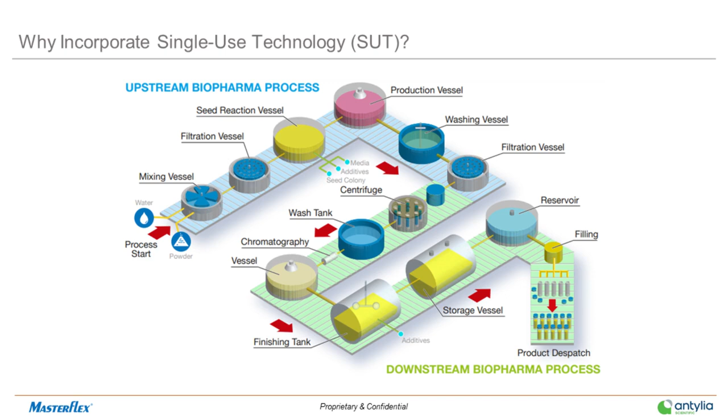With all the discussion around single-use technology and single-use assemblies, you might wonder, where are the most effective places to use single-use assemblies in a traditional workflow? Well, on screen, you will see a representation of a fairly traditional biopharmaceutical workflow. From the initial stages of cell growth to purification and harvest, and finally ending with fill and finish. At each stage along the way and within the gaps between the different steps, fluid transfer typically takes place, which means that many standard workflows have several places where single-use assemblies could be used.

So what makes up a single-use assembly? Generally, there are three main groups of products that go into a single-use assembly. The first and most significant component is the tubing, and this is typically manufactured from materials such as silicone or PVC. The second group of components are items such as fittings, connectors, filters, and other key accessories that will make the integration into the workflow possible. The third group of components are more specialized accessories, a group that includes various essential sensors that might be needed to keep an eye on flow rates and inline pressures.

We can't forget to mention the peristaltic pumps that are often used within single-use systems to move fluid from A to B. Peristaltic pumps, such as those manufactured by Masterflex, are a perfect partner for a single-use system, as these provide convenient, non-contact fluid transfer that is robust yet gentle on the biological material that's being metered. With flow rate ranges that span from microliters per minute up to many liters per minute, peristaltic pumps can be safely used throughout most areas of traditional biopharmaceutical workflows.

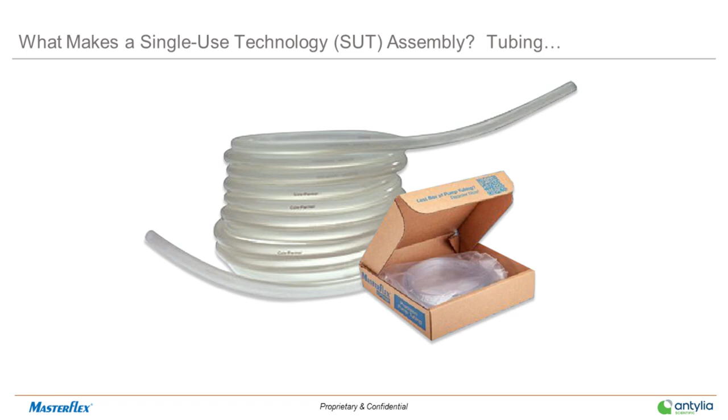Another key consideration when choosing tubing is, of course, chemical compatibility. In biopharmaceutical applications, the most commonly used and most widely accepted materials are typically silicone-based, with platinum-cured silicone tubing being the most popular due to its well-tolerated chemistry with biological materials and lack of leachables and extractables.

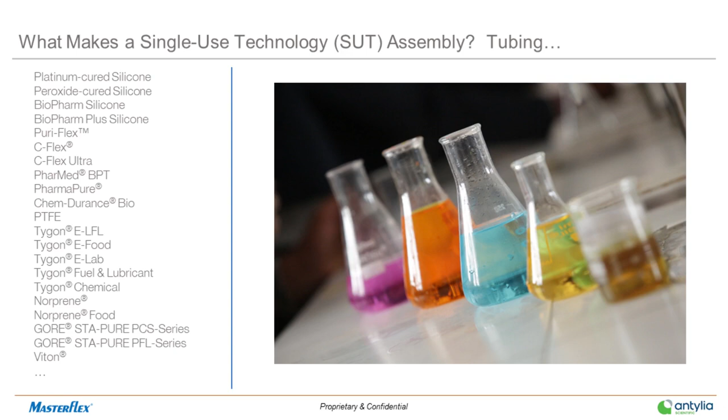In addition to the tubing, the next most commonly included components in tubing assemblies include fittings and inline accessories, such as valves and filters. The fittings are available in many configurations to ensure compatibility with the process line, from traditional threaded connections to barbed connections to sanitary and pipe threaded connections. Many different options are available.

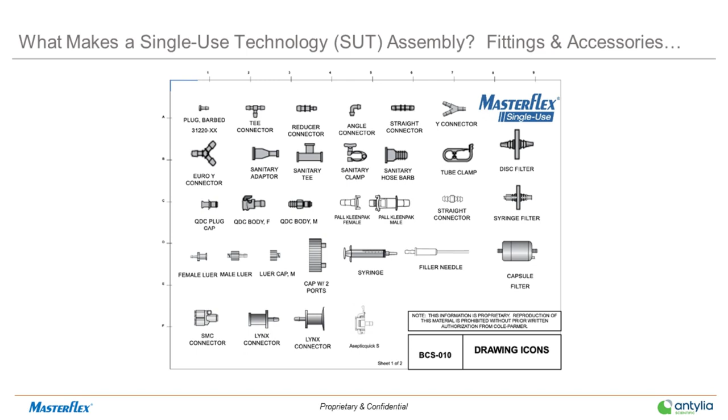Other components include essential accessories such as inline filters and items such as clamps and valves, which can be utilized to manually shut off fluid flow along a given pathway. Both this slide and the next slide highlight some examples of more commonly used accessories in this category.

Imagine having to stock all of these in a GMP environment, making sure the stock is available at the right time. Not only that, but then assembling these correctly with the right tube. This can take time and can cause problems for biopharmaceutical manufacturing.

Everyone could stock these, given enough space and time, but the beauty of single-use technology is that suppliers such as Masterflex take all of those problems and deliver you the end product when you need it, with confidence, having assembled all of the components in ISO Class 7 clean rooms with dedicated staff and facilities.

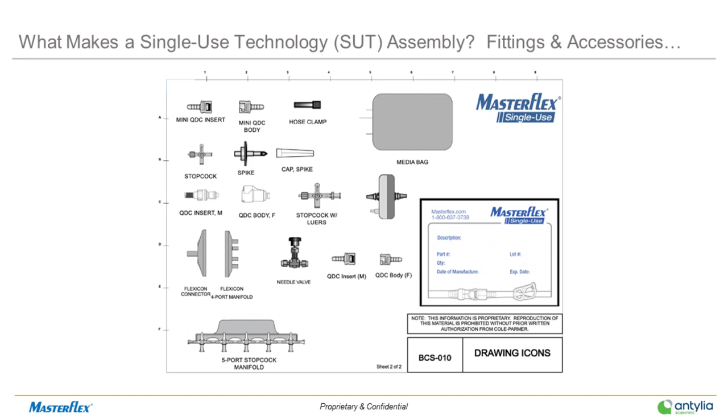And don't get me wrong, this doesn't happen overnight. Masterflex, for example, would assist and work with the end user to make sure that the design and specification of a single-use assembly is tailored to their process needs.

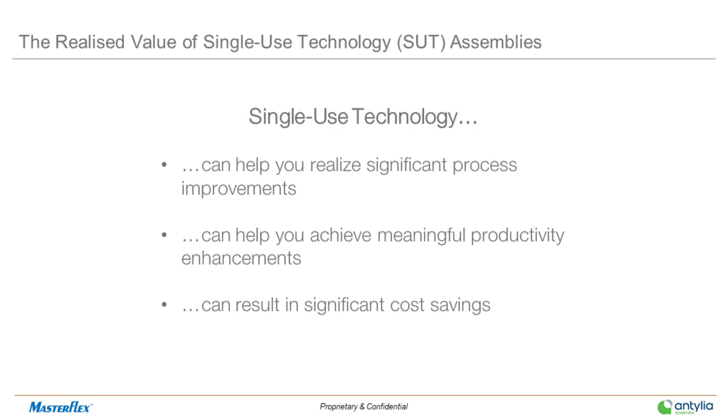Ultimately, the central message is that single-use technology can truly be implemented throughout your traditional workflows and can help you achieve process improvements, enhance your overall productivity, and even result in significant cost savings and improvements to revenue. To better understand the financial benefits that can be realized through single-use technology, let's take a look at a specific example that illustrates these benefits.

In our example, Company XYZ is a contract manufacturing organization. In their production process, they have identified 10 areas in the fluid pathway of their workflow where a single-use tubing assembly might be beneficial. And they would like to examine and compare the costs between having Masterflex manufacture the tubing assembly for them versus continuing to assemble the tubing assemblies themselves on site.

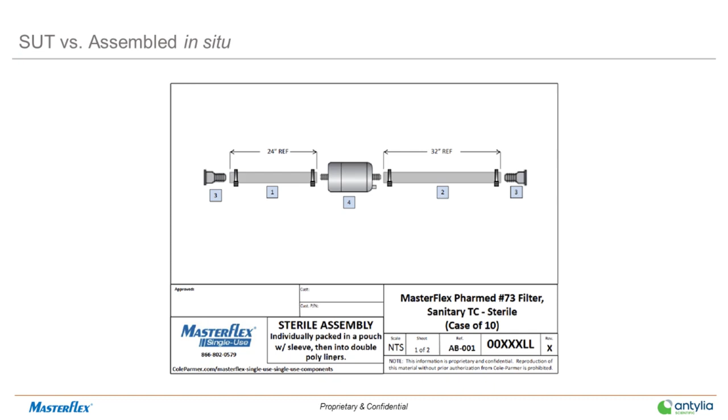The assembly they would like created for them looks similar to what is shown on the diagram on screen. The overall assembly is approximately 1.5 meters long, complete with 2 sanitary fittings secured, one on each end, and with an inline filter capsule to capture stray particle matter.

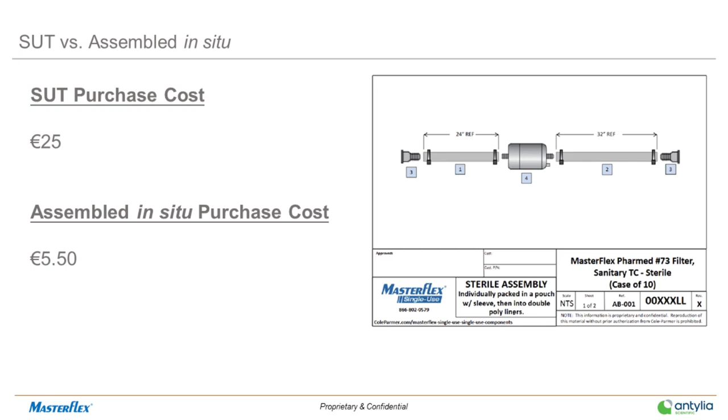But if we're truly to understand the true cost of ownership, we need to ask if there are other things to consider beyond just the initial purchase price. For example, one question to consider is what are the labor costs involved when assembling those components? Well, let's look at this a little bit closer to better understand what those costs are.

When looking at the labor costs to properly install each option, things start to get a bit more complex. For the Masterflex single-use assembly, the only real labor cost involved would be opening the package and connecting the 2 exposed ends of the sanitary fittings to the equipment in the fluid path.

But if the tubing assembly is being manufactured from raw components on site, then there are other labor costs to consider, including the labor to prepare the individual components and assemble them properly, the labor costs related to performing gamma sterilization on the completed assemblies, the labor costs to test the assemblies for integrity, and the labor costs to perform complete installation. Not to mention the associated costs with procurement of the components from multiple vendors and performing routine inventory management on all of those components.

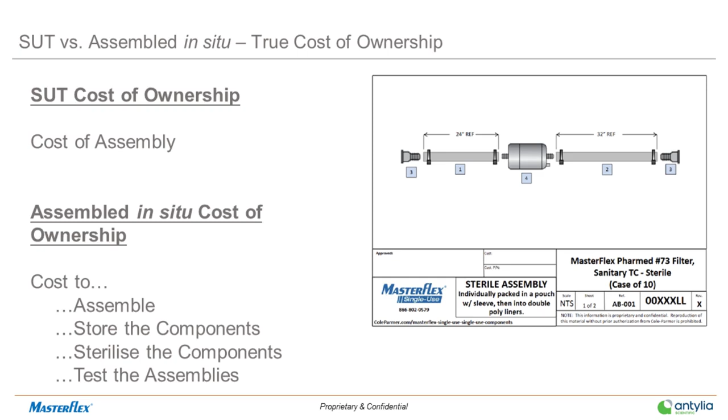For the purpose of this scenario, we will assume that the assembly technician is being paid a fully burdened labor rate of €65 per hour. Now, this includes both the salary the worker earns, as well as extra costs company XYZ incurs, for example, insurance, training, and resources for the worker.

Looking at this more closely, it is estimated to take up to 6 minutes to open the packaging and properly connect and test a Masterflex single-use assembly. But for the same assemblies to be made on site by company XYZ, the total time investment per assembly is estimated at 30 minutes, in large part because of all the separate steps that must be factored into the process.

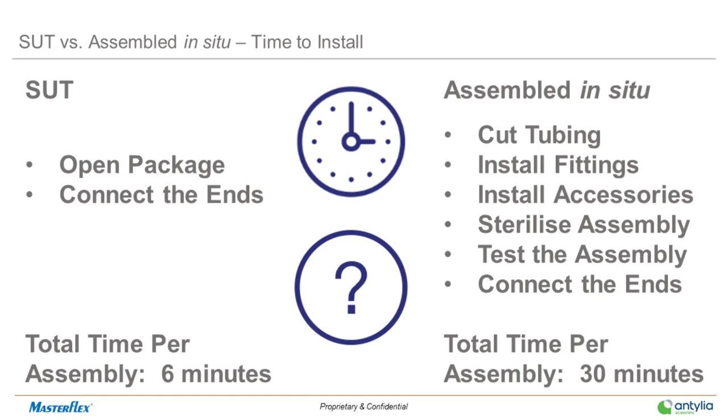Now that we know the estimated time to properly assemble and install each option, and the fully burdened labor rate, we can perform some simple maths to understand the full labor costs to properly install 10 assemblies needed per batch. For the Masterflex single-use assembly, with an estimated 6 minutes per assembly at €65 per hour, it would take 1 hour to complete the work and cost a total of €65 to complete the installation of 10 tubing assemblies.

But for those same tubes to be assembled and installed on site, the cost would be substantially more. At 30 minutes per assembly needed for a complete installation, it would take 5 hours to complete the assembly and installation, which at €65 per hour would cost €325 to complete the installation of 10 self-made tubing assemblies.

Now, let's take a fresh look at what the true total cost of ownership would be for each option, adding the initial purchase price and labor to install each option. For the Masterflex single-use assembly, the initial purchase price is €25 per assembly, making the per batch purchase cost €250. Then adding in 1 hour for the installation labour of €65, it brings the total cost of ownership per batch to €315.